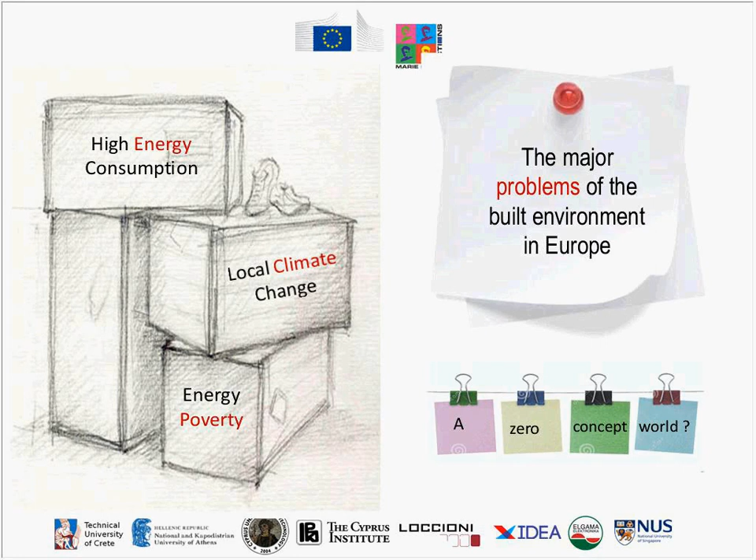So, in order to start the presentations, the major problems, as we mentioned before, of the built environment in Europe are the high energy consumption, the local climate change, and the energy poverty. Concerning the consumption, buildings consume almost 9 petawatt-hours and represent up to 41% of the total consumption. The European building stock is close to 24 billion square meters, and almost 75% of them are residential buildings with an average floor space which is close to 87 square meters per dwelling, while the rest is tertiary buildings. Almost 27% of the total energy consumption in Europe is spent in residential buildings, and the rest of it is consumed by the tertiary sector.

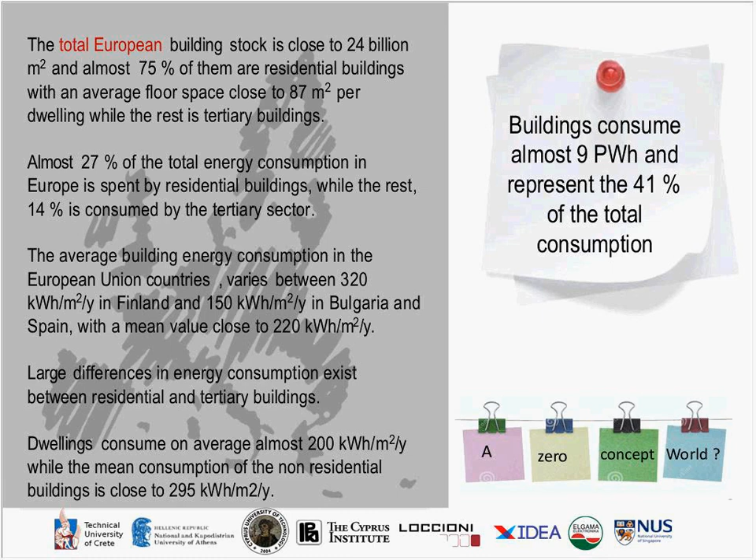The average building energy consumption in the European Union countries varies between 320 kilowatt-hours per square meter per year in Finland and 150 kilowatt-hours per square meter per year in Bulgaria and Spain, while a mean value is close to 220 kilowatt-hours. Large differences in energy consumption exist between residential and tertiary buildings. Dwellings consume on average almost 200 kilowatt-hours, while the mean consumption of non-residential buildings is close to 300 kilowatt-hours per square meter annually.

The energy consumption in tertiary buildings has had a constant increase during the last 30 years, and the increase rate is 1.1% for the years 2010 to 2020, which is quite important. The increase of the energy demand is because of the evolution of the services sector that has increased by 1.3% per year. And services will be responsible for a huge amount, 93% of the additional energy to be consumed by tertiary buildings between 2000 and 2030.

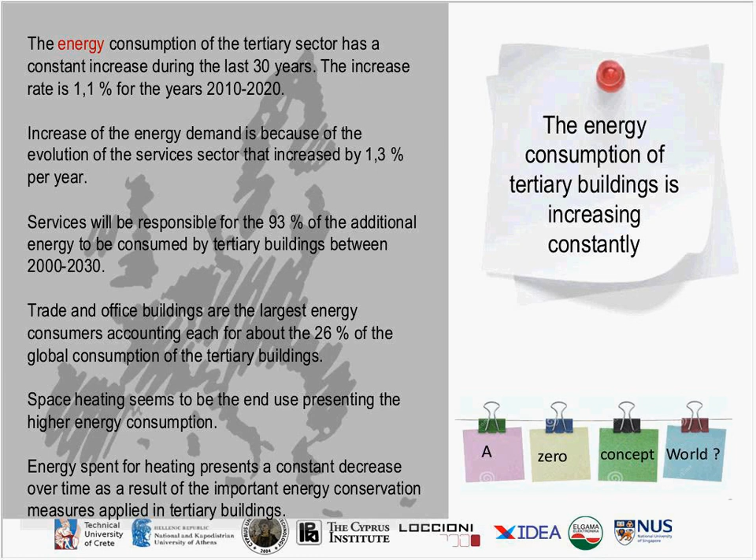So trade and office buildings are the largest energy consumers, which account for about 26% of the global consumption of the tertiary buildings, and space heating seems to be the end use presenting the highest energy consumption. Energy spent for heating represents a constant decrease over time, which is a result of the important energy conservation measures applied in tertiary buildings.

In residential buildings also, the energy consumption is increasing constantly. And this happens despite the strict legislative framework and the significant improvement of the energy efficiency. It has increased by 14% between the years 1990 and 2012. The electricity use has increased by 60%, and this is because of the very rapid penetration of devices and electronic appliances.

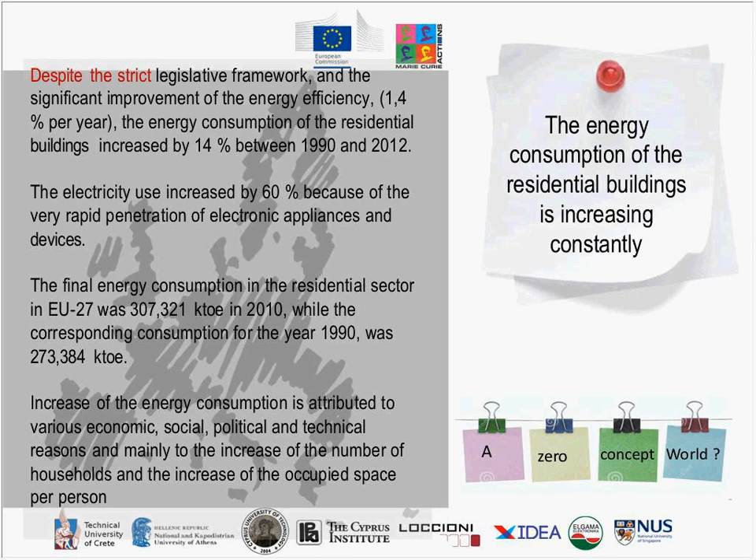The energy consumption for heating is also increasing constantly. Although the total energy consumption of buildings has increased, the specific consumption for heating purposes has decreased by about 15% during the period of 1997 till 2009. And this may be attributed to the considerably lower consumption of the new buildings, because the new buildings after 1997, which represent almost 20% of the total dwelling stock, have been built with better directives and better legislation. So there has been a decrease in the energy consumption for heating.

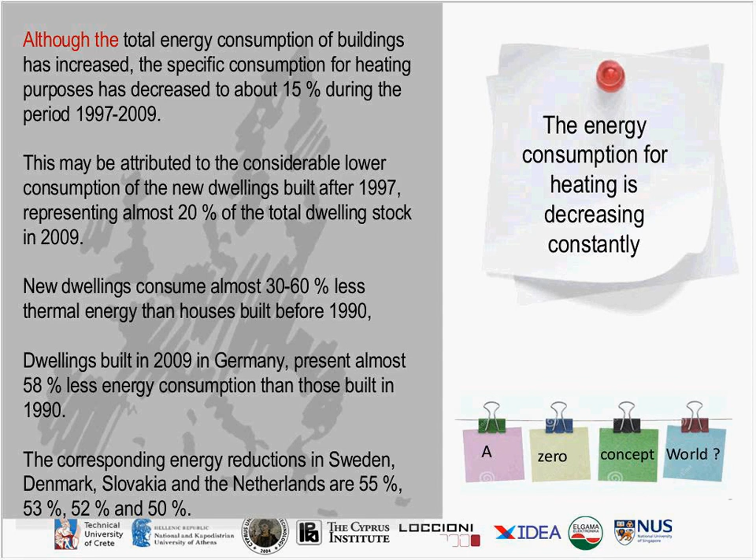So the new buildings consume almost 30 to 60% less thermal energy than houses that were built before 1990. Dwellings built in 2009 in Germany represent almost 58% less energy consumption than those built in 1990. And the corresponding reductions in Sweden, Denmark, Slovakia, and the Netherlands are about 55%, 53%, 52%, and 50% correspondingly.

The impact of the economy on the energy consumption of buildings. The energy consumption in the building sector is subject to significant economic, environmental, and social factors. Past and present experience demonstrate that it is an extremely sensitive sector, presenting a high variability in economic and environmental variations, and financial problems oblige part of the population to consume less energy and satisfy partly less needs.

It is characteristic that during the financial crisis of 2007 to 2012, the energy consumption of the residential buildings decreased by 4%, while in countries which had a deeper economic problem like Portugal, Slovakia, and Ireland, the decrease was 16%, 22%, and 22% respectively. And this is characteristic because of the serious economic recession in Greece, and the consumption of heating oil was reduced by 68.7% in just 1 year.

Concerning the local and global climate change, which has a serious impact on the energy balance of Europe, the climate change, which is the third factor of the three major ones that we mentioned before, is a major issue for Europe, of course. The increase of the ambient temperature and the higher frequency of the heat waves have an important impact on the energy and environmental quality of the built environment and increase the vulnerability of the local population.

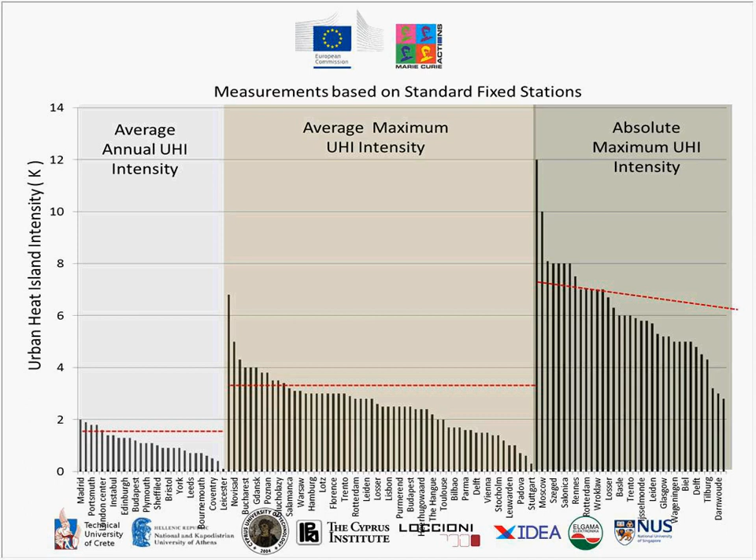So the impact on energy based on different scenarios and forecasting of cooling degree days shows an increase for the years between 1960 to 1990, and a major increase up to the years of 2091 to 2100.

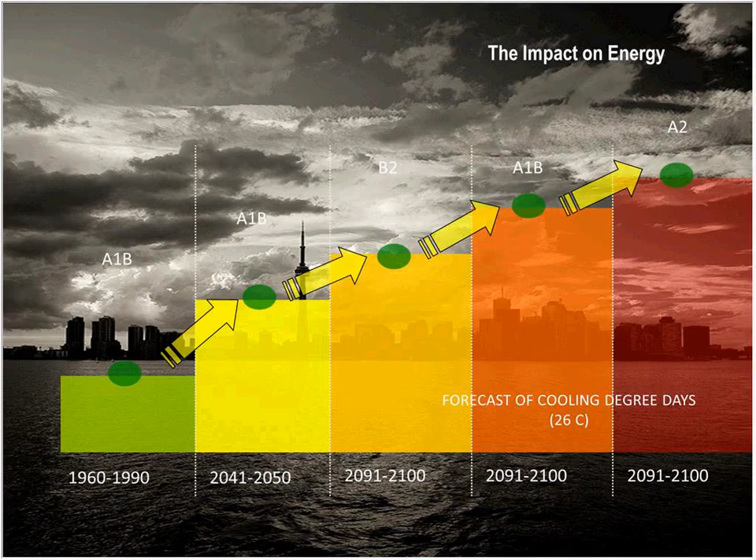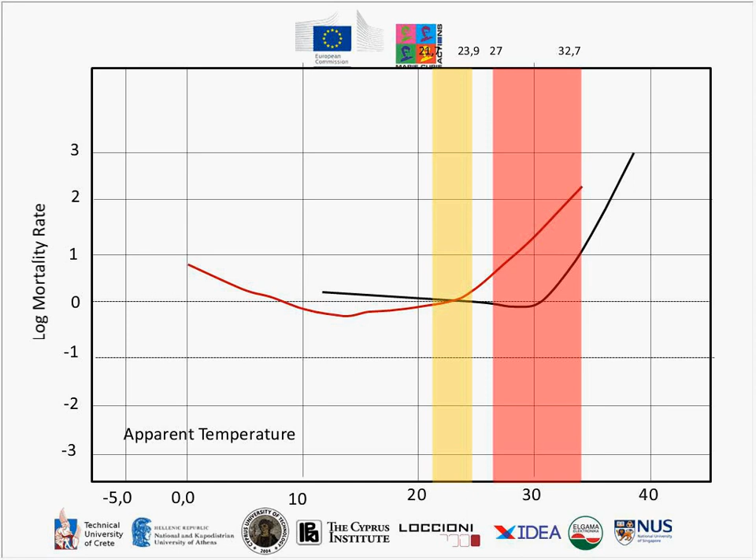Concerning the energy poverty, it is clear, and it has been stated that there are almost, let's count here the zeros, a large number of population which is energy poor in Europe. Energy poverty is actually a threat in Europe, and it is the situation in which the household lacks a socially and materially necessitated level of energy services in the home. Energy poverty is a problem of a vast population in Europe, 150 million, who are unable to pay the bills and maintain comfortable standards.

This is particularly valid for the citizens of the states with GDP below the EU average, where over 30% of the population face energy poverty. And this has a very serious impact on the quality of life of the citizens, affecting indoor comfort conditions, social attainment, and health. And it is a result of combined factors like the insufficient family income, the poor quality and the low size of the house, and the possible high energy prices, while some other demographic drivers may also play a very important role.

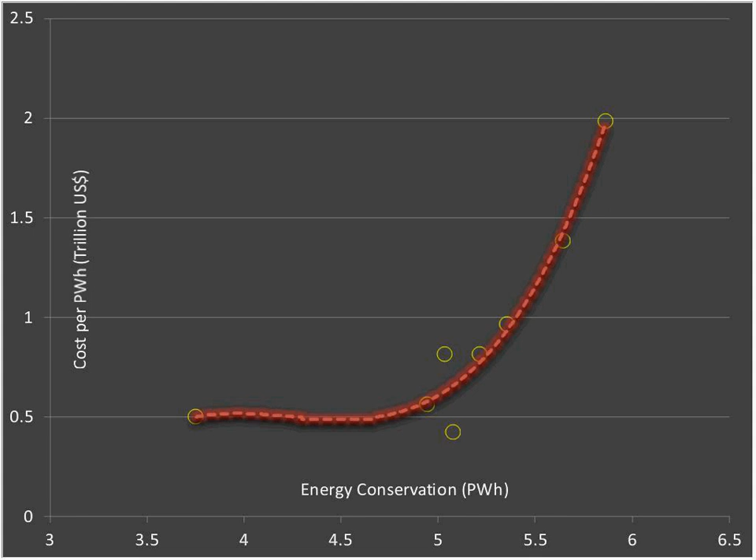So the cumulative investments to almost minimize the energy consumption of the building sector in Europe by 2050 should be around 14 to 23 trillion euros, and the CO2 emissions of the residential sector in 2050 will be reduced by 90% compared to 2005, while the corresponding decrease of the tertiary, this is always a very difficult word for me to say, I can never say it, Aphrodite is correcting me right now, is close to

87%. The application of energy efficiency measures has, of course, a positive effect on employment, and the number of additional full-time jobs created in Europe per 1 million euros invested varies between 6 to 39, with an average value close to 18.9 jobs per million euros invested.

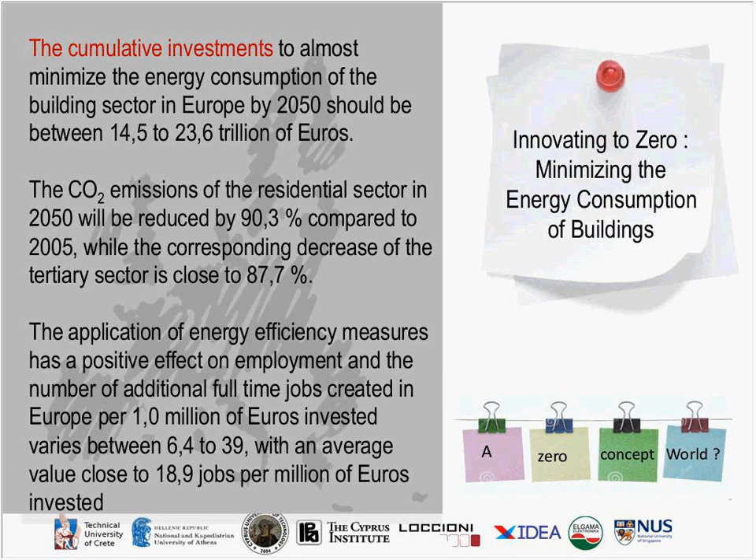Well, of course, the minimization to zero of the energy consumption has to do with smart systems and smart buildings that provide optimal management of the energy resources in the building, while they satisfy all comfort and sanitary requirements, and all the advanced ICT technologies, when applied to buildings, can coordinate and network the energy-related components in a more holistic way.

So as I mentioned before, this full information can be given through a publication that I can distribute to you later, which has to do with all these policies, actions, investment, and the other benefits.

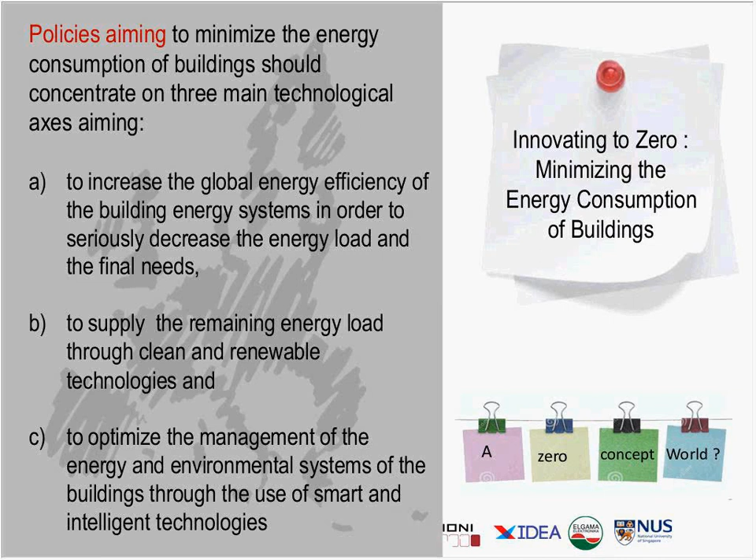The intensive research has permitted to develop various technologies that help to mitigate and minimize the amplitude of the local climate change. Among the most promising technologies are those aiming to increase the albedo of cities. Highly reflective materials are used on roofs and/or in the pavements to reflect solar radiation and avoid absorption of solar heat, and these technologies are well known as cool roofs and cool pavements, respectively.

And a variety of highly advanced reflective coatings and materials have been developed, presenting a very high reflectivity in the solar spectrum together with a high emissivity value. Cool roof systems are extensively used around the world, and their capacity to mitigate urban heat island is, of course,

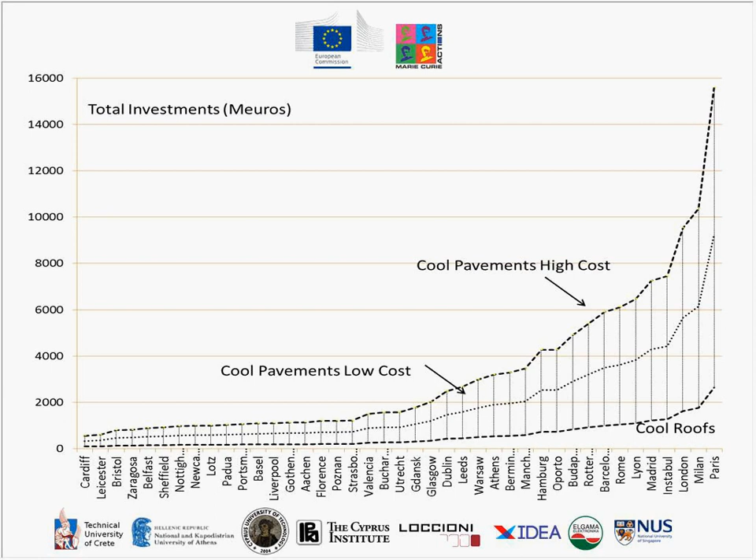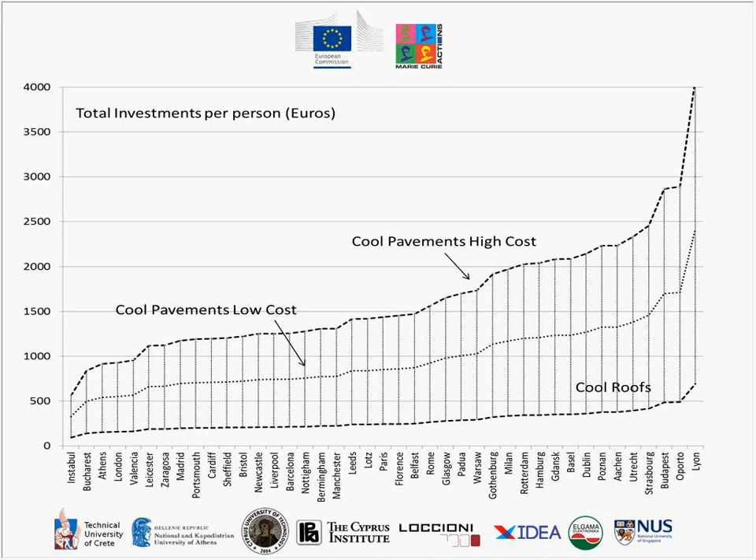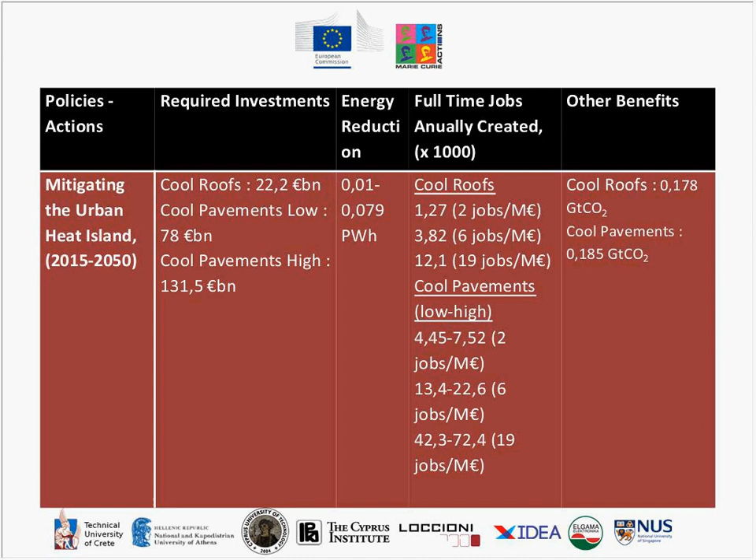So eradicating the energy poverty: the energy rehabilitation of the homes that are occupied by the lowest income households is the most efficient policy to fight the energy poverty and to protect the vulnerable population. So a deep retrofitting of the building stock used by the energy poor in Europe could have very significant social,

financial, and environmental advantages. So to estimate the possible benefits from such a policy, the necessary investments in order to minimize their energy consumption as well as the existing housing conditions have to be known, or at least they have to be estimated somehow. And given that energy poverty is not approached in a common way in Europe, there are divergent assessments about the total amount of the energy poor.

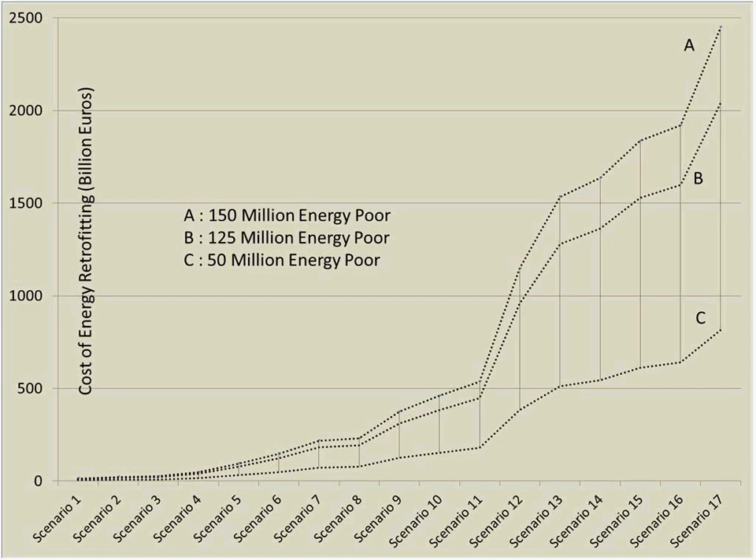And here, what we can see is the cost of different scenarios on the rehabilitation of the low-income houses in Europe, and the actions and the details concerning the eradication of the energy poverty.

Concerning the high energy consumption of the building sector, the local climate and energy poverty are the major problems of the built environment.

In order to conclude, these three sectors are strongly interrelated, as we analyzed before, and they present very significant synergies and trade-offs.

The existing policies aiming to reduce the energy consumption of buildings usually underestimate the importance and impact of the local and global climate, as well as the technical, social, and economic implications related to energy poverty.

A failure to consider all the issues in an integrated and holistic way may inevitably result in higher energy consumption and social discrepancies. So innovative zero built environment in Europe assumes a minimization of the energy consumption of buildings, the eradication of energy poverty, and the mitigation of the urban heat island and local climate change, as three factors that are very strongly related together.

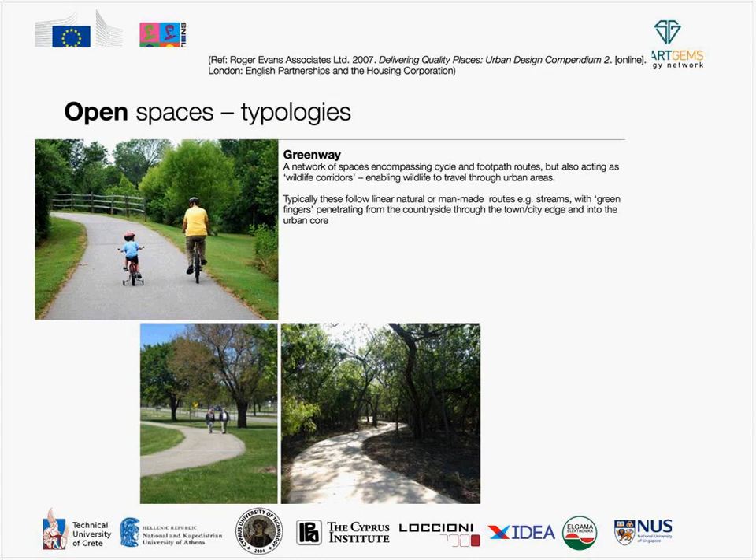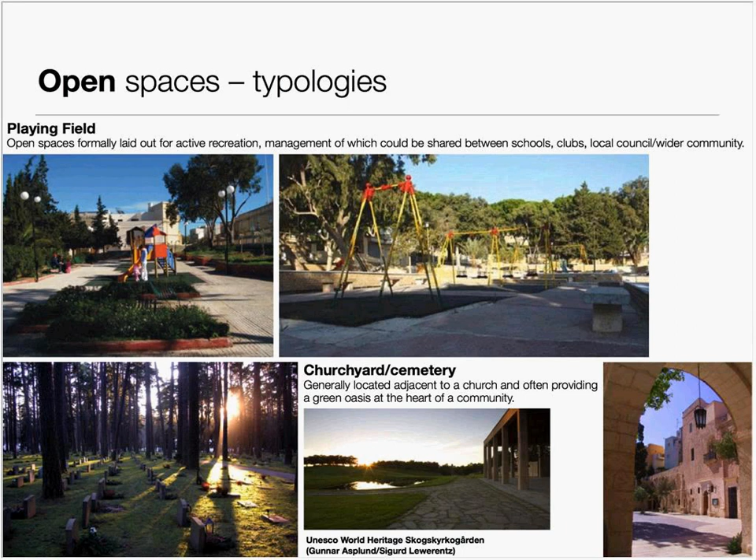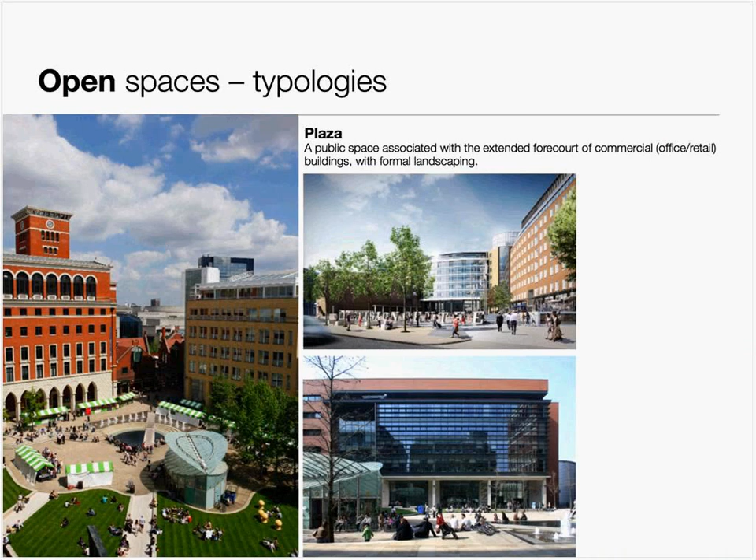We can see here a few typologies of open-air spaces like greenways, waterways, meadow, woodland, playing fields, churchyards and cemeteries, allotments, urban allotments, park, green spaces, piazzas, squares, playgrounds, communal gardens and private gardens, courtyards. All these spaces obviously can be used to enhance the cohesion of smart communities.

Smart city visions have received wide criticism. By and large, this criticism has focused on the ill-defined notion of smartness in smart city visions, targeted the simplified view of what cities actually are, and attacked their apolitical technocratic nature. What does smart mean, and who are actually supposed to be smart? Is city life and the urban experience about control, efficiency, and predictability, or about encountering the unexpected and dealing with differences? Moreover, smart city views propose technological fixes to complex problems. Many so-called smart technologies or smart interventions are implicitly driven by logics of consumption, control, and capsularization, but do not empower citizens to become active players in their cities.

The push for safety with CCTV and smart risk assessing algorithms turns cities into places of pervasive control and surveillance. Smart retail solutions, location-based services, and predictive algorithms push a consumerist view of urban life. Also, personal mobile technologies foster a culture of capsularization and retreat. When technology-driven solutions ignore active contributions of citizens, they may have adverse effects for urban public life and identities at large.

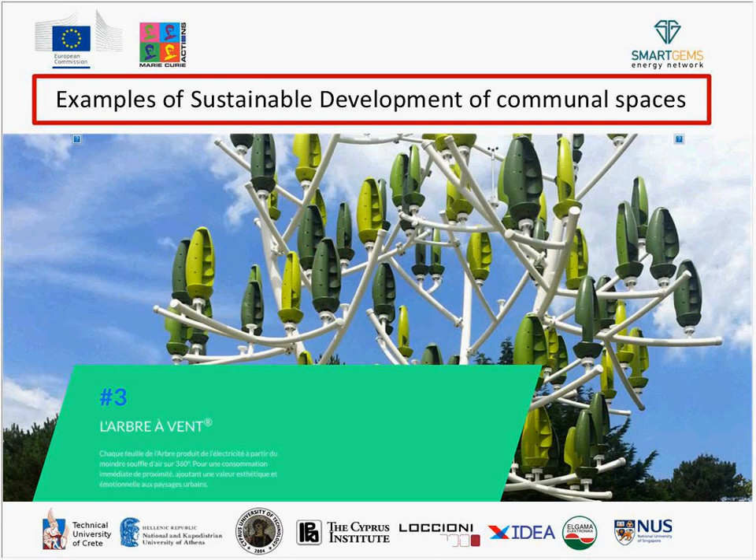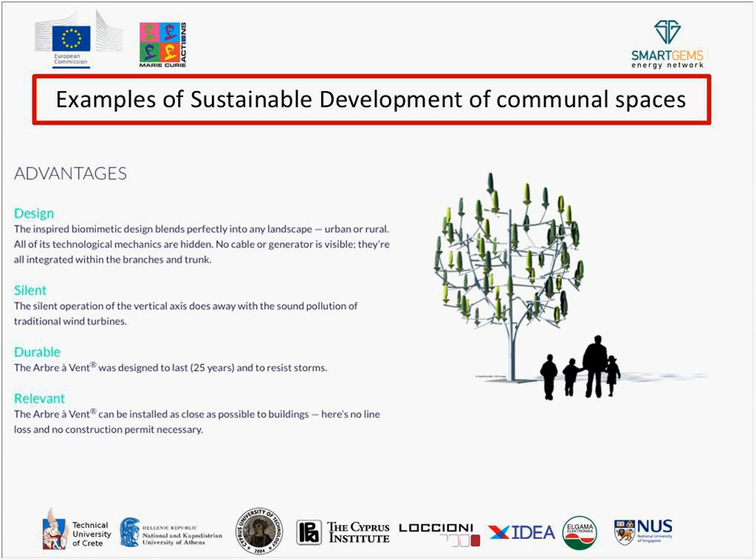Another interesting example is L'Arbre à Vent. It was designed and produced by a French startup company which developed this as a wind turbine inspired by biomimetic understanding, and in particular from trees. Two of them are already installed in Bretagne - you see the photograph, taken from the website of the company. Advantages in terms of design are that it is silent, durable, and relevant with the urban environment where it was installed, and the equivalent of the energy produced by it.

Yet another example, designed for Paris, is the Escale Numérique, which translates as digital break, inspired by the city's 19th century network of drinking fountains. Escale Numérique taps into an underground fiber optic network to provide the fountain of free Wi-Fi in a haven of quiet on a busy city street, comprising a large touchscreen protected by a sustainable green roof covered with plants, and concrete swivel seats with mini tables and an electricity supply. It heralds the kind of thing that could be achieved on a larger scale.

Another interesting example is the COTree, which is a physical installation shaped like a swirl plant. The installation has a CO2 sensor measuring the surroundings, and depending on the concentration, the tree will either wither or grow. The leaves will change shape and color. The measurements determine the life of COTree.

That way, the presence of the viewer has a direct impact on the life of the COTree. Normally, it wouldn't be possible for the human eye to see the impact of CO2 on our environment, but COTree makes it visible. The viewer sees a part of reality that hopefully will be hard to forget.

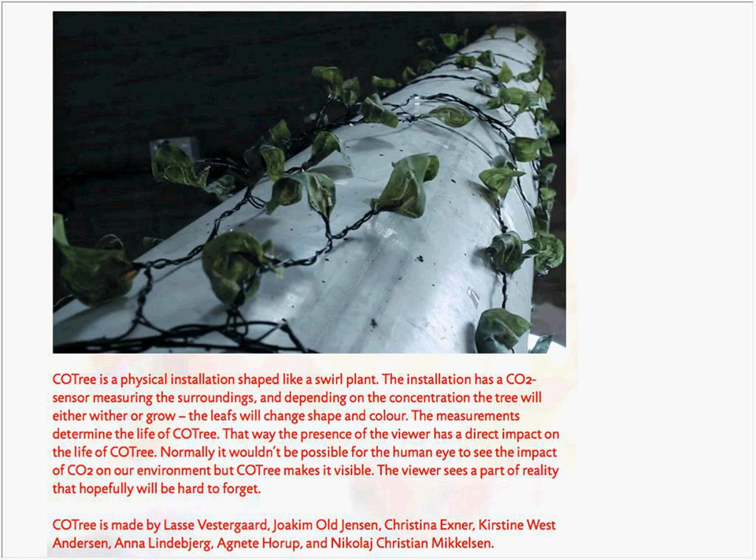And lastly, in our list of areas of interest is community participation in planning. Online community participation forums have become common over the last decade, with most councils and government bodies offering an online feedback mechanism. The extension of this type of feedback and citizen engagement is the subject of the current research project

Discussions in Space at Queensland University of Technology, working with Brisbane City Council, is looking at ways of providing forms of in-place digital augmentation, which refer to the ability to enhance the experiences of citizens in physical spaces through digital technologies that are currently accessible within that space.